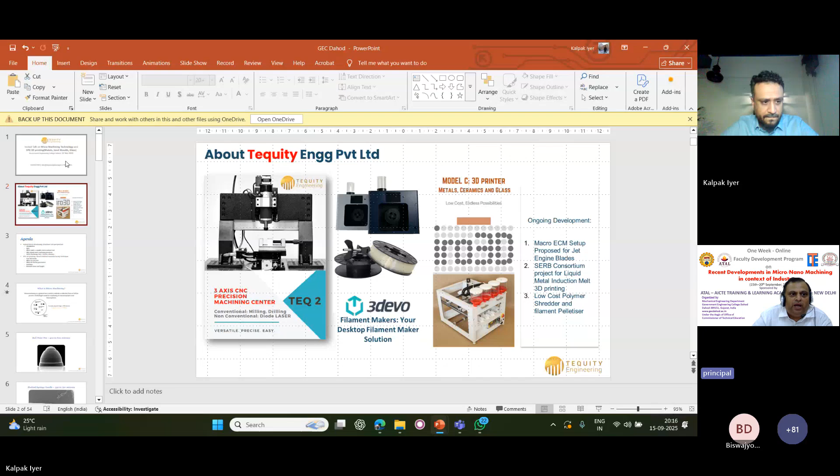Dear participants, Kalpak Iyer sir is the CEO of Tequity Engineering Private Limited, a Mumbai-based startup working in the field of lab-scale advanced manufacturing technology. He completed his bachelor's in mechanical engineering from College of Engineering Pune in 2009 and his master's in business administration from GIM Goa. He spent significant time as an employee at Mikrotools Private Limited, a Singapore-based company that most academicians know about, and later started his own startup, Tequity Engineering. It is now a 4-year-old business, and their aim is to make advanced manufacturing technology based, affordable, accessible, and high quality machine tools. They currently manufacture CNC micromilling centers, SPD 3D printers, and filament extruders for FDM, etc.

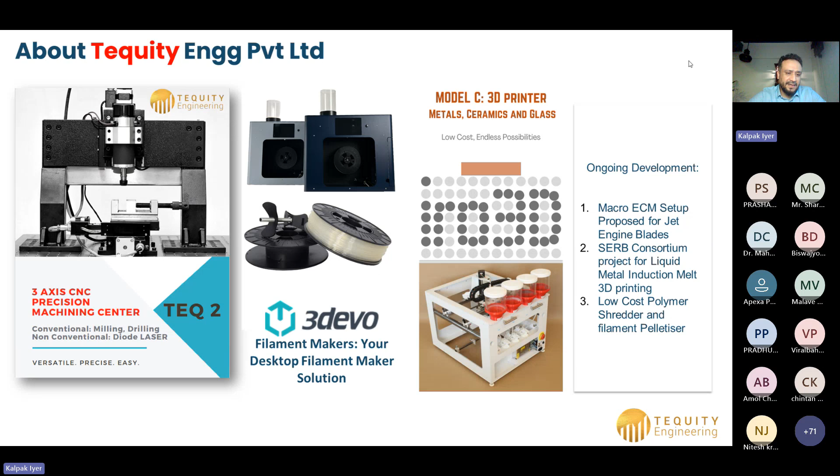So with that, I will start my talk. I will try to split my talk into two halves. The first one would be a talk on hybrid micro machining, a machine tool perspective. It shall cover what is micro machining, the three M's of micro machining, and what makes a machine tool capable. If you wanted to develop a machine tool, what are the key things to keep in mind? Why hybrid micro machining, and what is so special about it? We will look at a case study, and also, if you want to machine or build a part through micro machining, depending on what the part is made of, what machining process you must choose.

I will try and cover all of these things based on my experience. The second part of my talk shall be on SPD 3D printing, a novel additive manufacturing technique developed by us. I will talk on how this technology works, what materials we can print, the parameters for those, the machines available, and the research areas and targets. So that's how I shall structure it.

What we can do, if your permission is there, is we can split the talk in two. We can have a question answer session after the hybrid micro machining section, and one more after the SPD 3D printing section, if that is okay, because I understand these are two different technologies.

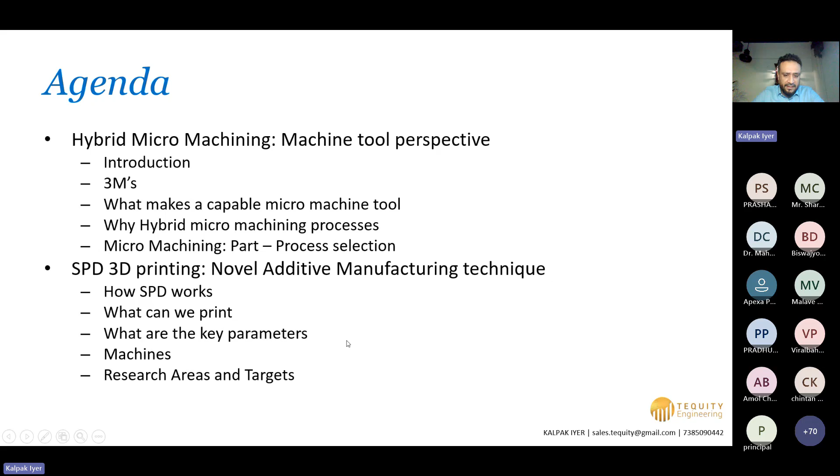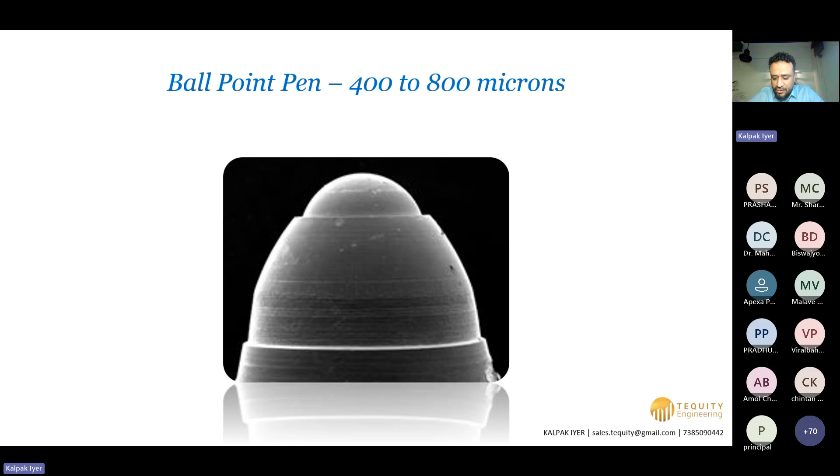I think Harshit sir covered this really well - what is micro machining. I'll just share some photos of some nice parts, something we use on a day-to-day basis. A ballpoint pen - the ball itself is micro machined. It's amazing that such a thing can be 5 rupees or 10 rupees. Sometimes it's tough to believe.

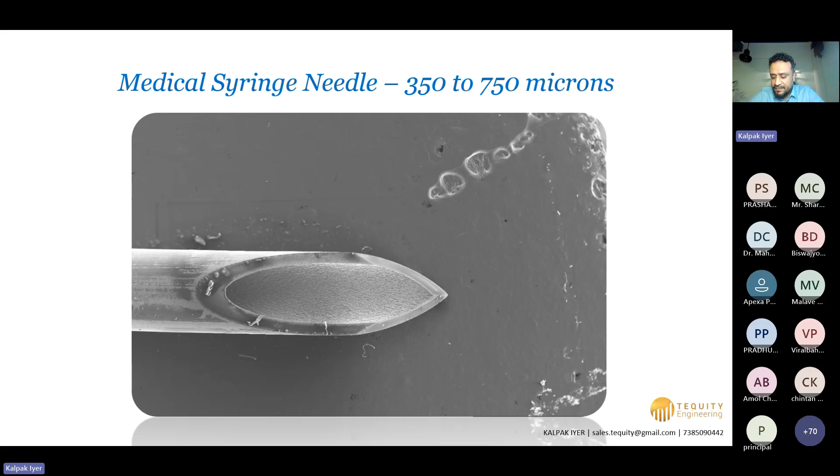Surgical needles - I hope we don't use these a lot, but now even smaller needles are out in the market, typically between 0.35 to 0.75 mm. Then human hair - some of us have a lot of it, some of us are losing it, but all of us have different diameters, tending to be between 70 microns to 180 microns.

Harshit sir had a very good explainer of what is a MEMS device - they tend to be in the tens of microns range. So as you can see, I'm going from larger to smaller.

If we really talk about things around us, nature is the best creator, definitely. Red blood cells are 5 to 10 microns. That doesn't mean we cannot make something that small - we can also manufacture nano - but what nature can do, it's virtually impossible to replicate.

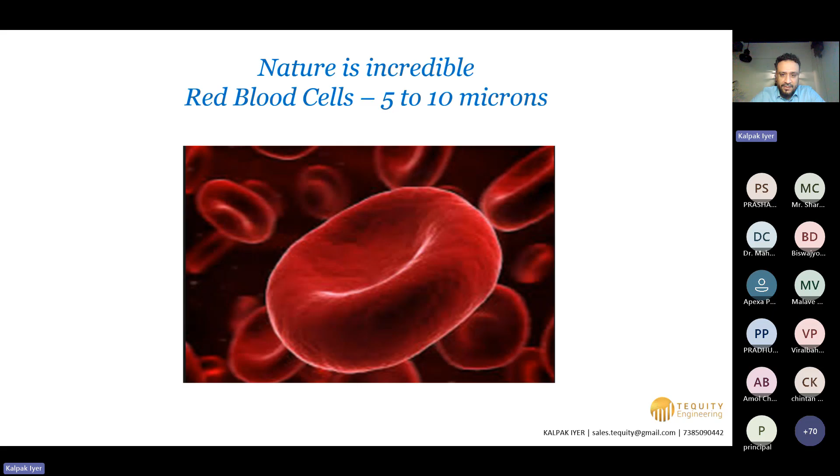There are plenty of areas of micro manufacturing, and my talk shall actually show a lot of images of parts that I have myself been part of making. It's very exciting to be a part of this field, actually.

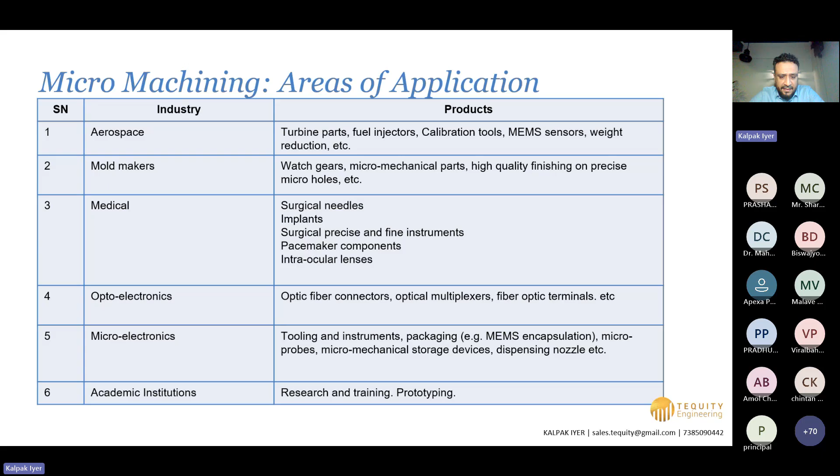So these are all the areas that we have actively worked in: aerospace, mold making, medical sectors, optoelectronics, microelectronics, and of course research, training and prototyping. A lot of areas and a lot of everyday products that we use have tons of micro machining and nano machining in them.

So let's talk about what makes a good micro machining system. As my talk will focus on machines, as we are machine makers, I may not be able to answer very well fundamental questions, although I have a fair understanding, I hope. But I will talk about the machine tool perspective.

There are three things that go into making a very good high precision machining system: the machine tool itself, the machining process that you employ, and measurement. These three are very crucial, especially if you want to achieve high precision micro machining. Let's look at each of them briefly.

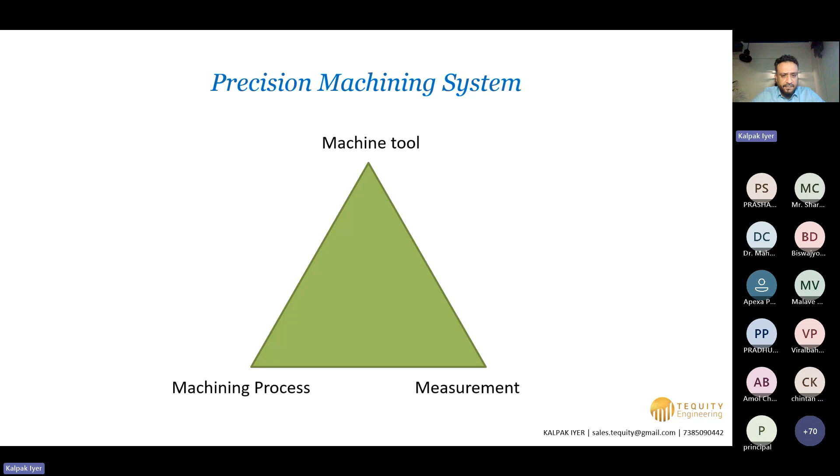The machine tool itself - now I have to give credit here to Mikrotools Singapore. I will be giving illustrations on micro machining through one of their machines, DT110, which is, in my opinion, one of the most capable, versatile micro machine tools in the world. It was created by Mikrotools Private Limited, a Singapore-based company. No intention to market the company here - the idea is let's take examples from some really good, industry-proven techniques, and let's try to learn them, deconstruct them, something like that.

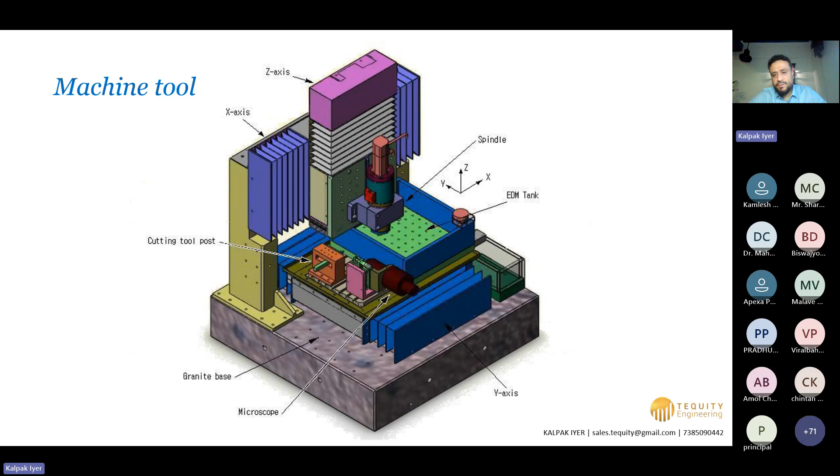We need a very stiff, low vibration, rigid, high precision structure to be able to do micro machining. If any of these are not in place, it is very difficult to achieve high precision micro machining. So here are some broad characteristics required for the machine tool.

Firstly is the drive contact mechanism, whether you go for mechanical, aerostatic, or hydrostatic driveways. Then the motors you select. Broadly, micro machining tools use stepper motors, AC servo motors, or linear motors. Each has its own benefits.

Real-time error compensation: a lot of micro machining can be open loop, and then you're at the mercy of hope and nature, because over time wear will happen on your guides and drives, and you won't be able to compensate for it. A closed loop system is usually much better because it gives you real-time error compensation. Even a 20 micron error can completely derail your part, because sometimes your parts are themselves 50 microns or below.

The encoder's resolution is very important—the encoder is the device that reads the position. It is preferred to have laser interferometry here, so optical scales are better to use, and also rotary scales. Some very good rotary encoders are on the market. So which encoders do you use? That is, of course, if you're going for a closed loop system.

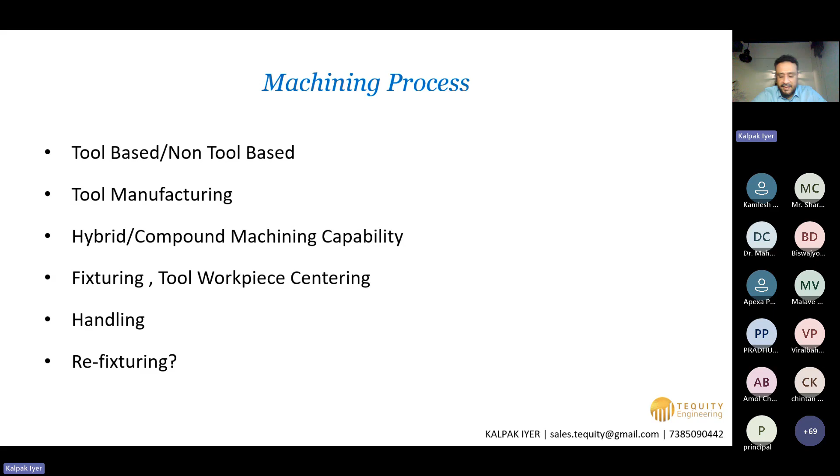So these are the aspects of the machining process. And finally, the aspects of measurement.

It is preferred to have on-machine measurement when trying to do micro machining. You need to, as much as possible, reduce manual intervention and handling. You need to reduce refixturing as well. That is where the number of axes on your machine will actually help.

In the case of reducing handling, the versatility of your machine matters—for example, the same spindle can do milling and then start doing EDM. That will reduce handling. Real-time measurement and viewing can be very important in tool-based processes, especially optical measurement and sensor-based measurements for different types of sensing.

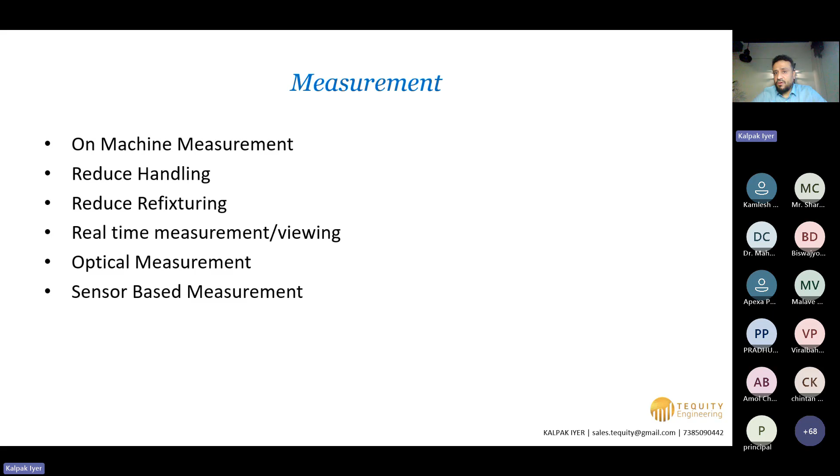So these three things—the machine tool, the machining processes, and the measurement systems—are all the ingredients to make a good micro machining center. One has to choose which one they need to prefer and go for.

As you can imagine, the choice is always limited by cost. You can want a very precise machine, but the cost starts going up, and not just cost, skill. It's not simply that I can buy components and sit and assemble them. There is a lot of skill involved in making these machines.

A very good example is the DT110 machine that I spoke about. The single same machine can do these following processes. The ones in red are tool-based processes: micro turning, milling, drilling, and grinding. The ones in orange are electrothermal processes: micro EDM, micro wire EDM, and micro wire EDG.

And this is laser machining. So all of these processes on the same machine—we will see what makes it so capable and why there is value in having all of these processes on the same machine.

The machine is basically a 3-axis machine. It would be better if it was a 5-axis or a 7-axis machine, but you can't always get everything. It has closed loop continuous control. It has on-machine measurement through an optical microscope. It has a fairly decent positional accuracy of 1 micron per 100 mm.

Machines that were even 8 to 10 years old displayed a very, very tight accuracy. Resolution of 100 nanometers—resolution is basically the least value that the machine can read and travel. It has an electrically isolated spindle.

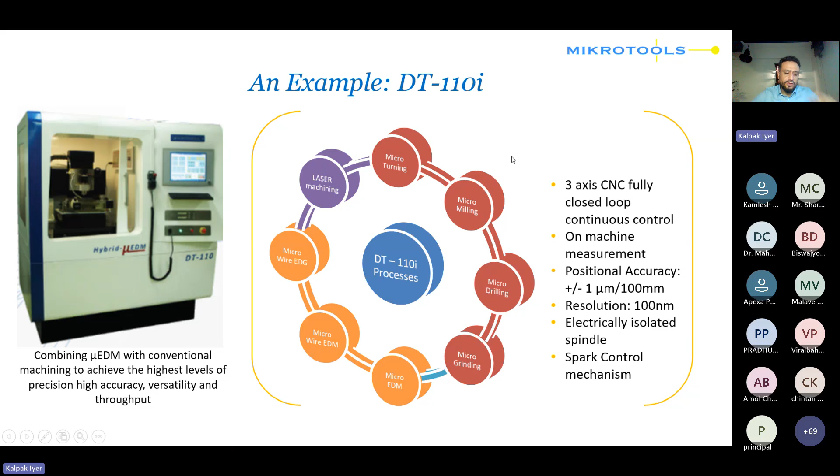I will just be keeping my talk with the focus on this machine, but we will be talking about different types of micro machining. So continuing on what makes a capable micro machining center—the idea of sharing this information is so that it serves as a guide for somebody who wants to develop their own machine and maybe wants to get some good pointers on how to start.

So what makes a capable micro machining center? The basic specs, the travel—how much travel do you need? Typically 50 mm to 200 mm is the travel for each of the axes. Good enough for micro machining, but sometimes larger machines are required. For example, large dies and molds require very small holes at select locations.

The machine has to be built with consideration of maximum vibration isolation, stiffness, accuracy, and corrosion resistance—very important aspects for developing a good machine. The accuracy and repeatability both should be better than 5 micron per 100 mm of travel. I think it goes without saying, and I think we all can appreciate why that is the case.

And gantry structures are good structures for these types of machines. Again, gantry structures provide the best rigidity and very high stiffness compared to many other structures. There are fewer overhangs here.

Isolation, vibration isolation—you can have passive isolation. Passive isolation is basically dependent on the materials you select. For example, you use a monolithic granite base or a ceramic base. You use cast iron components, which also aid in damping. Also, you use some passive damping pads below the granite base so that all vibration can be absorbed by the machine.

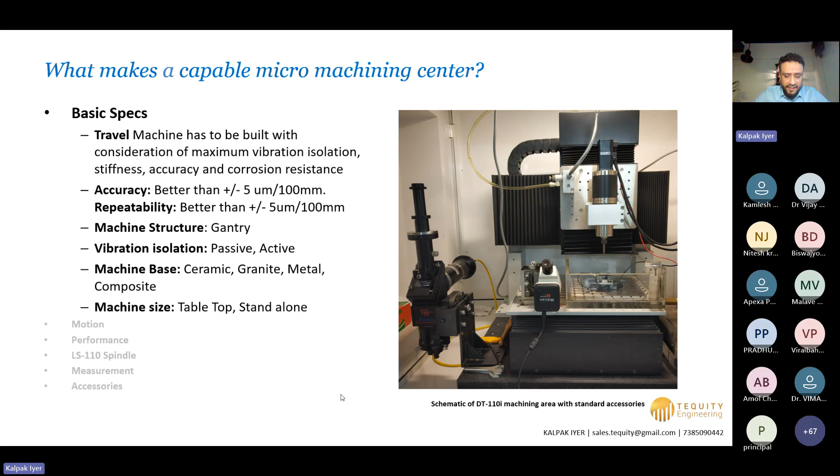Then the motion, very crucial for any CNC machine - what type of motion you choose. Typically LM guideways must have high rigidity, accuracy, reliability, and smooth motion. When you want all of these things, it is a little expensive to choose the right one, because it must also be able to withstand even the smallest radial loads and moment loads that the machine can generate.

A micro machining system will not generate anywhere near the radial or moment loads or the axial loads that a large machine will generate. But even those small loads have a lot of impact on the quality of the parts.

The slide stiffness is a very, very important aspect because if it is not stiff, especially on dynamic load conditions, you have very unreliable results of part finish, of part dimensions, etc.

Then the drive that you choose - lead screws also work. Lead screws have a bad name, but lead screws can be very well made and they can work. Ball screws are better, lower friction, but linear motors are the best and the most expensive. Very rarely does it happen that the best is not the most expensive. So it is the case here as well.

Same with motors - you can use stepper motors. Stepper motors are very strong, quite accurate, but they have much inferior jerk control systems. They cannot get to their top speed as fast as something like servo motors. But again, here the best in class is the linear motor, definitely.

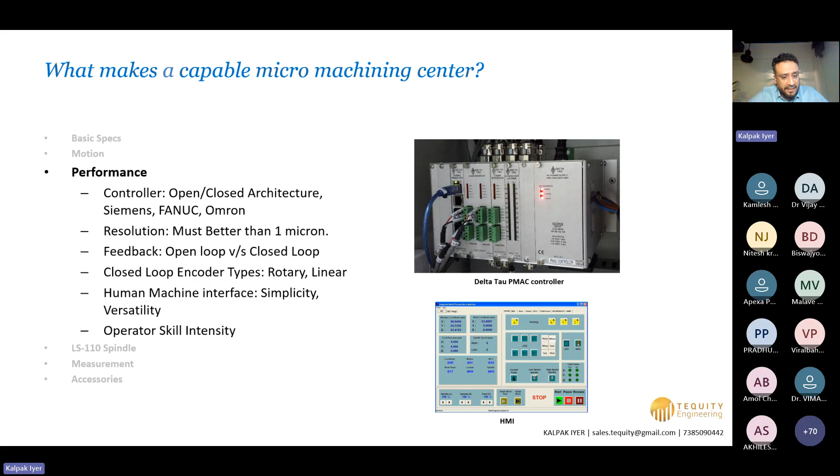The next one is the HMI, human machine interface, and operator skill intensity. Of course, it all boils down to the spindle head. For micro machining, you want high RPMs - upwards of 20,000 if possible, upwards of 50,000 is better. Then there are some considerations of the runouts of the spindle, radial and axial runouts, and what kind of torque or power output they have.

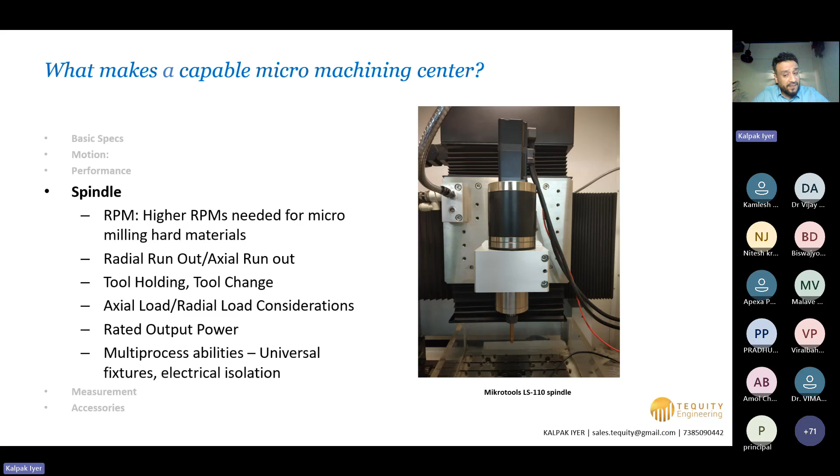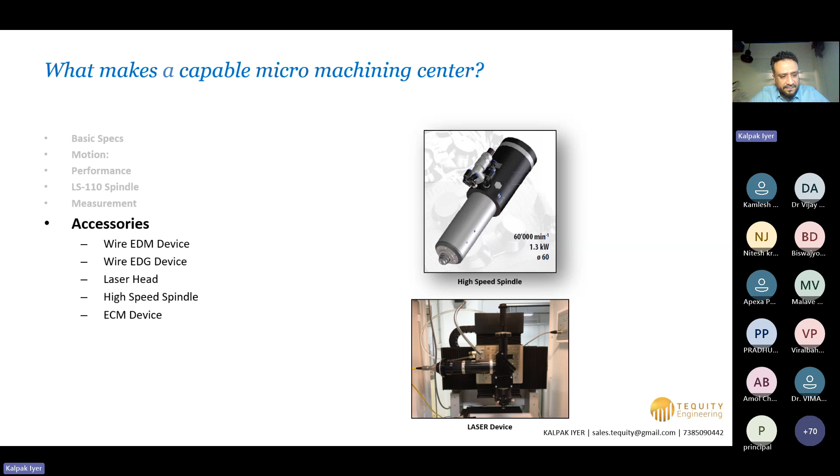And also, because we're talking about hybrid micro manufacturing, we should have switchability of tool heads. It's a very useful feature in micro manufacturing, as some of my examples will show you. Good to have a good measurement system on board if possible. And some accessories - for this machine, there are accessories like wire EDM, wire EDG, laser head, high speed spindle, and ECM device.

So the case study that I promised you - the objective was to make a well finished 40 micron hole on a stainless steel plate. So how do you do that?

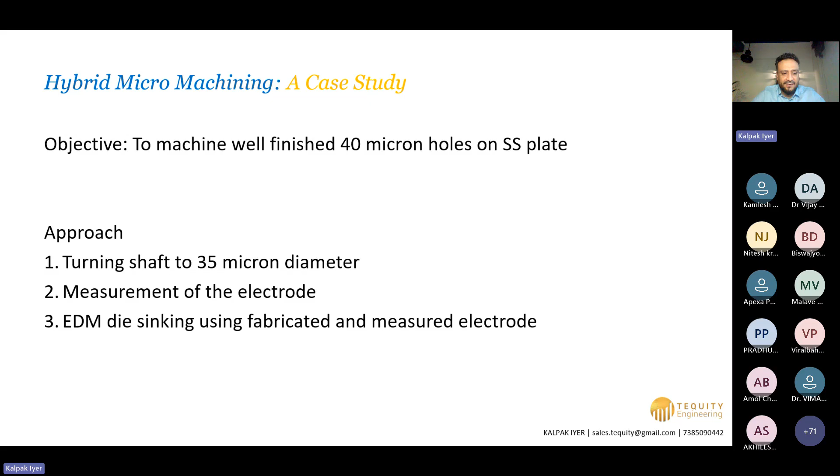The approach idea was that let us turn the shaft to a 35 micron diameter. We'll measure that electrode - that shaft becomes the electrode, because the spindle, after micro turning, can actually be made into an EDM spindle, and then it can EDM the hole. So this is as simple as that - what is so difficult, right? Let's make a 35 micron diameter shaft, measure it, and EDM the holes.

Quite straightforward. You start with micro turning, done with the aid of the measurement system. You need to be able to center the tool with regard to the workpiece. The workpiece is usually mounted vertically on the shaft. The tool is on the bed - a single point cutting tool, a PCD tool, polycrystalline diamond.

Harshit sir said very aptly that up to 100 micron, micro turning worked quite well, but after 100 micron... so a brass workpiece was selected and micro turned up to 100 micron. The machine is so well built, it did it, and you were able to see it happening live. You can see the image here, and then we tried to go below, and this deflection starts happening - it's quite irritating.

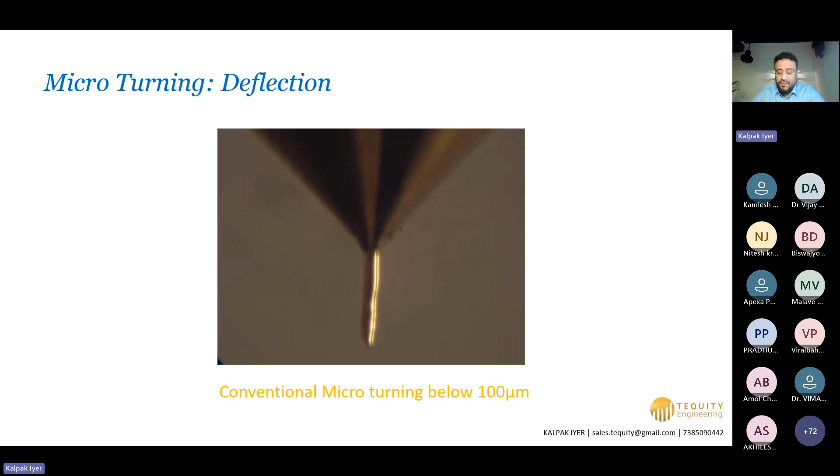So is it because the material you bought, the vendor is cheating you, or maybe the tool is not good enough, or whether the machine is not stiff - you start doubting yourself a lot, especially with these kinds of machining technologies. It starts to become apparent that the nose radius of the cutting tool used is usually 200 microns, 150 micron nose radii.

So the nose radius, instead of becoming purely a cutting agent, always adds a radial force. If this is my shaft, there is a radial element to the cutting aspect of turning, and majorly we want axial shear, but there is a resultant force. A big stock is easily able to withstand this and does not deflect, but when you start talking about sub 100 microns, deflection becomes a real problem.

So why don't we have a tool with a smaller nose radius? Well, because it's not easily available or it's extremely expensive. And there is a reason why we have a nose radius on cutting tools - I will not go into why, we all know why. We cannot start with a very small nose radius tool because we know it will chip off and become useless.

So the idea was, let us machine up to 100 micron through turning. Then, because our machine's spindle has the capability of doing EDM, let us switch on the EDM and do wire electrical discharge grinding - an EDM process. Long story short, this nose radius became this.

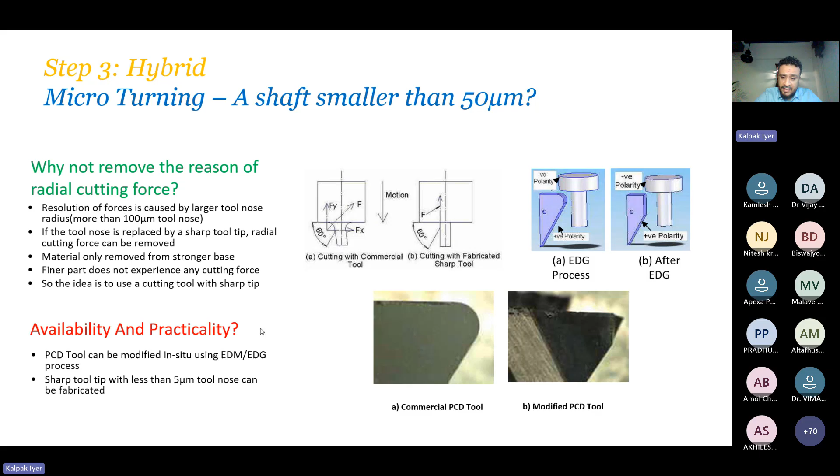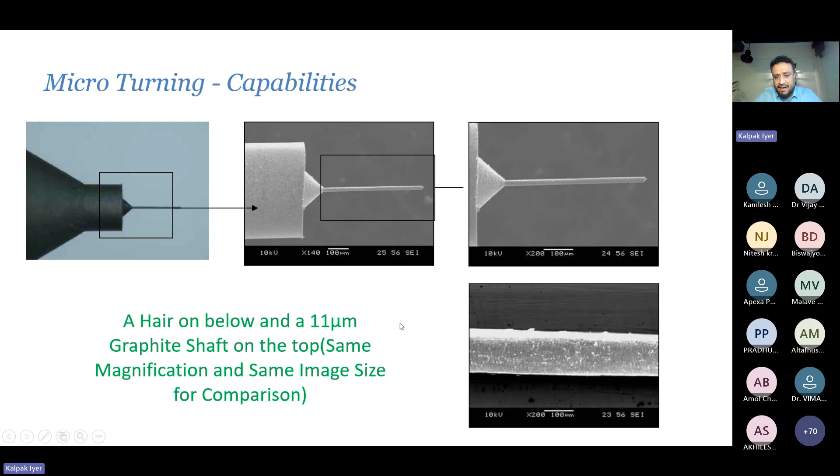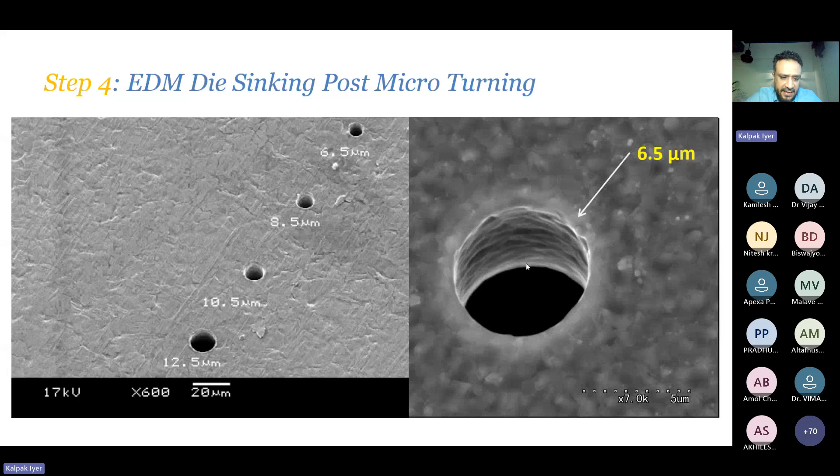And when this was made, this was the smallest hole made through EDM process - 6.5 microns. So that turning insert, or the turned electrode, was further turned to 5 microns, and then a 6.5 micron hole was made on stainless steel. Quite interesting that it was possible to do this.

So now at the business end of the presentation, some of the micro machining processes - some images of parts we've made, actually in India, at different places over the years. So these are some EDM electrodes. This one is not made in India - it's a surgical pin made in Singapore.

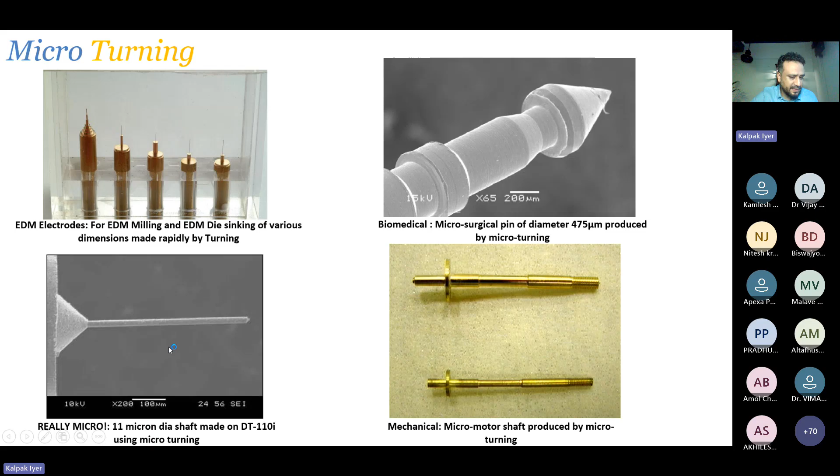This is the shaft that I showed you. Then some motor shafts that some of our clients made. Micro milling is a very interesting operation. Most of the images here are made here.

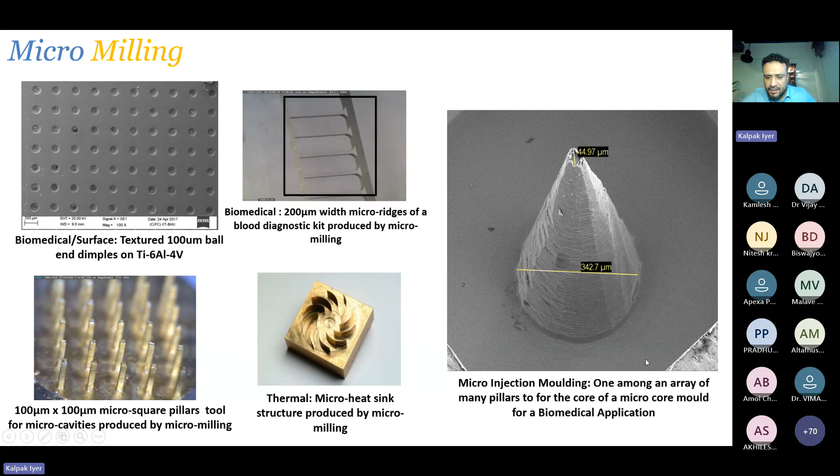This is a very challenging part that we did with IISc Bangalore, where this is SS316L, and we made these pillars. The base of the pillar is about 350 microns, and the top had to be 40 microns. So very difficult to achieve this without breaking the pillar. This was done through milling, successfully at that. So, micro grinding.

It is not really conceivable to put a glass workpiece on a machine and get on with it. You know what is going to happen? It's going to shatter. So you need to be careful about how you handle glass or other brittle materials, and you need to get a lot of the parameters right, especially the tool speed and the tool type.

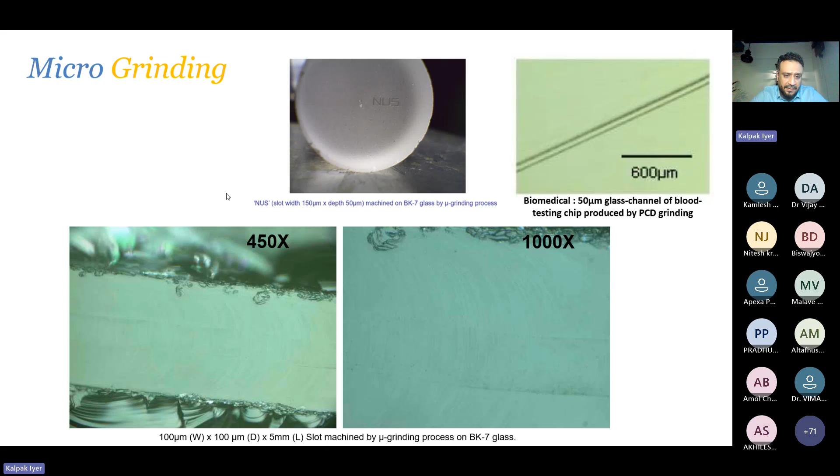Here we use some kind of PCD or CBN grinding heads or other abrasive media, and we give very light depths of cut. We have a very narrow range of the depth, and we are able to do micro grinding successfully. A lot of work on this has happened at IIT Patna, very good work on micro grinding on glass.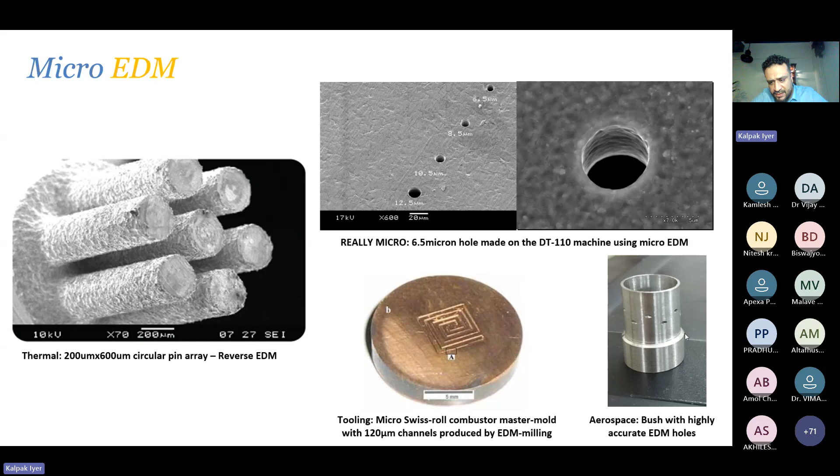Then some 120 micron channels. These are 200 micron by 600 micron arrays. And this part we made for ISRO—it is a bush with highly accurate non-radial holes using micro EDM.

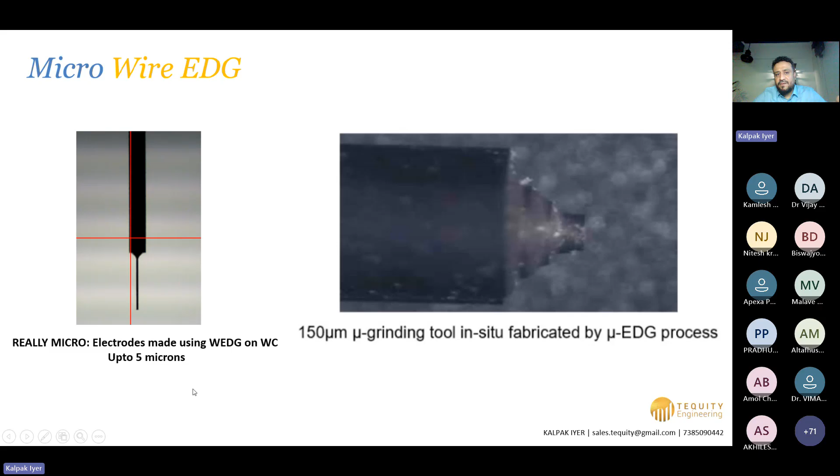It's very small. Again, this is through wire EDM—some micro fins made, micro gears made. Wire EDG, which I told you about during the example of micro turning, is a very interesting process. Even some of the micro grinding tools are made in situ on the machine using the wire EDG process. Electrodes down to 5 microns can be machined this way. Of course, for electrical discharge grinding or machining, the tool has to be of electrically conductive material.

And well, last but not least in my presentation, is laser machining. Very fast, very expensive, but a very useful process for micro machining. A lot of the other processes are slow and very intensive, but this is very good for 2D machining.

Or making some holes. Here on the right top, you can see a part from a trial we were doing with DRDO, of a spin actuator for triggering missile systems. This is a micro heater made out of nitinol, or shape memory alloy, for an aerospace application.

These are just some silicon blocks that we machined, and some micro cavities for micro needles were machined using micro laser machining. Okay.

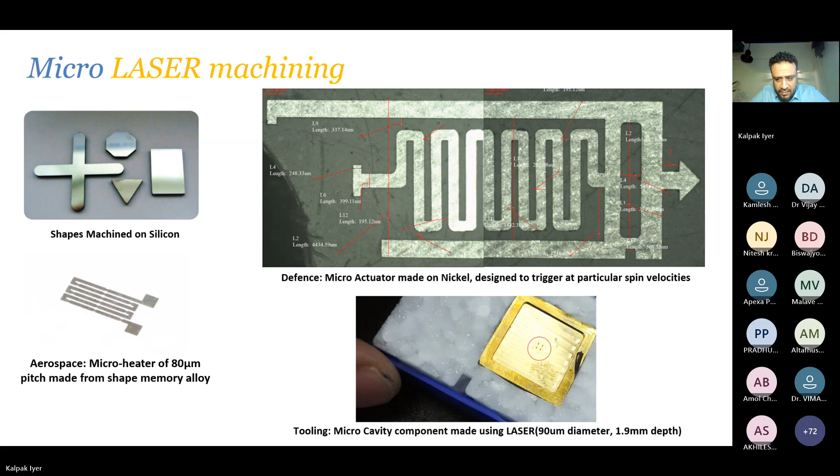Finally, I think this is the last slide on this subject—which process to choose? There are more processes, right? By no means have I comprehensively mentioned the processes for micro manufacturing, but these are quite a lot of the processes. And as you can see, if you're able to combine the machining process and the measurement systems well, micro machining is really possible.

As a manufacturer of small machine tools, we make micro milling machines at a very affordable price. Of course, you have to make compromises when it comes to these tools. The idea why I chose to make these machines is because the presentation I gave involves a very expensive machine tool, and not many industries can really adopt it. The idea was that, hey, I don't want 100% of the capabilities—why not 80% of the capabilities at a much lower price? So we put a lot of those learnings into action, and hopefully we are able to do something good with it.

Now, as you can see, some of the attributes that you want to have.

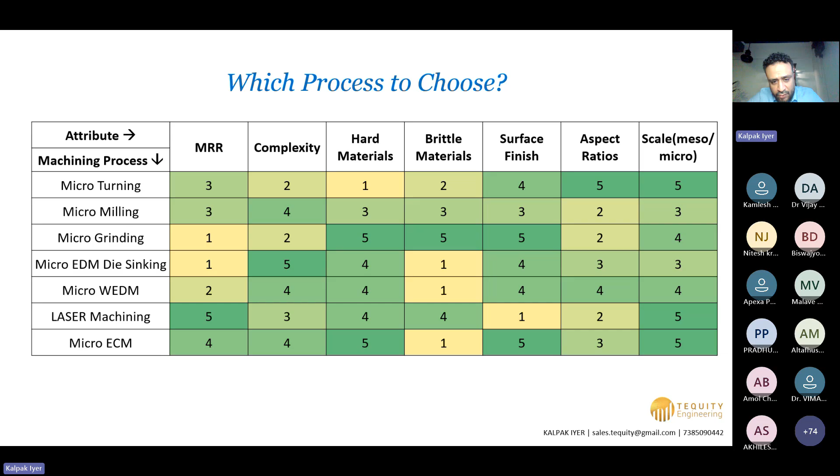So each process has its own pros and cons. It can approach different materials, because the first part of the presentation was about the machine tool, but at the end of the day, what do you want to machine? Based on that, you choose your process, go about fixturing it, set your experiment or process, and then try to achieve your part. So that was my talk on micro machining.

If there are any questions, I would like to address them now before I continue on to the other talk on selective powder deposition.

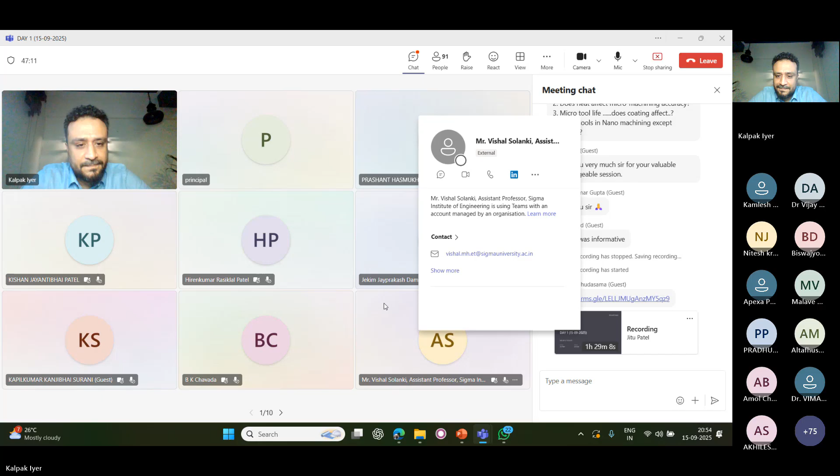Is there any question? I hope the presentation was visible and I'm audible throughout, sir. Okay, I'll start with, hello, yes hello sir. I'm seeing the message box, I'm seeing it, some participants have asked certain questions, sir.

Shubhangi ma'am has asked which software tools are used in micro machining machine video. I shall share a machine video link later on. I can definitely show software tools used in micro machining, though I don't exactly know which software you're talking about. If you're talking about the HMI, human machine interface, most companies design their own software.

Then there are some other aspects in micro machining, especially CAM. You need to have a very good CAM, especially if you're doing complex parts. Mastercam or SolidCAM or some other software can also do really good work. I'm not sure which other user-friendly software you're asking about.

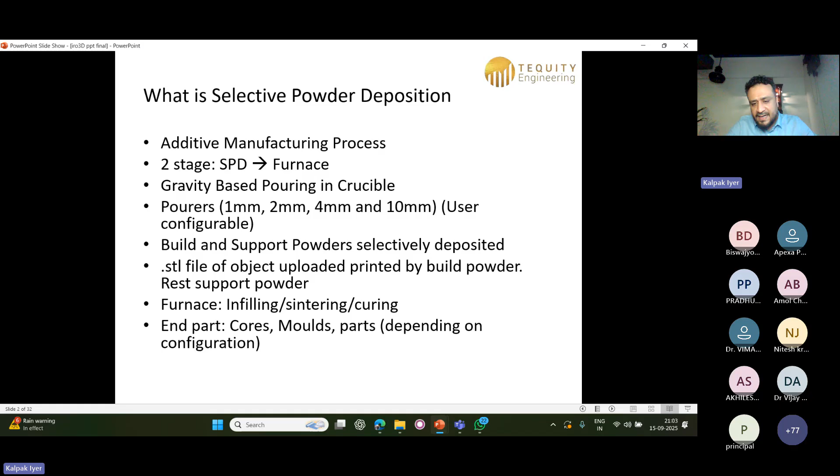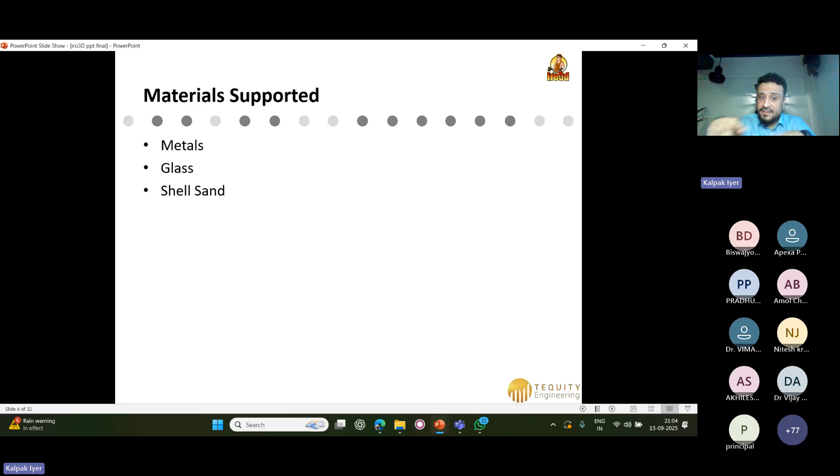I'll come to each of these. What are the end parts you can achieve? Cores, molds, or parts of metals, glass, depending on your configuration. Now here's the interesting thing - most 3D printing processes will only support one category of material, whether ceramics, metals, polymers, sands, composites. So most of them will usually support only one type of material. This process is material agnostic - we can print metals, glass, and shell sand in the same process.

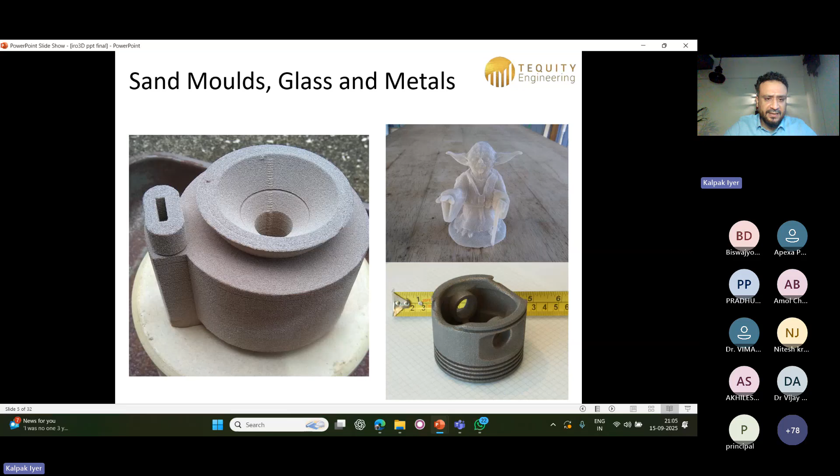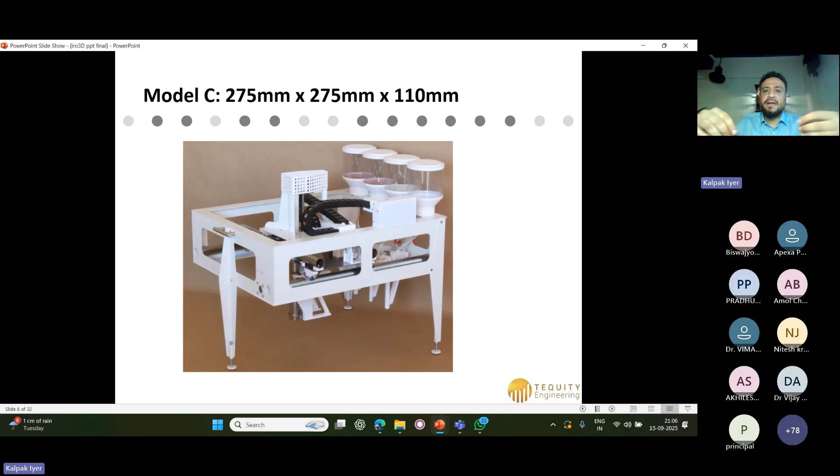Now let me explain a little bit from this image. This is a Model C, a basic version of this printer. As you can see, there are 4 hoppers, and each hopper is connected to a pourer - you can see some things dangling here. There are 4 pourers. 2 of the hoppers and pourers connected will have support powder, and 2 will have build powder. Support powders are usually refractory materials like silica sand, alumina sands, ceramic sands, etc. The build powder is of the part that you want to print - for example, if you want to print a metal alloy, the build powder will be metal powder. If you want to print glass, the build powder will be glass. And if you want to print a sand mold, the build powder will be appropriately resin coated sand. So this is the basic aspect of the process.

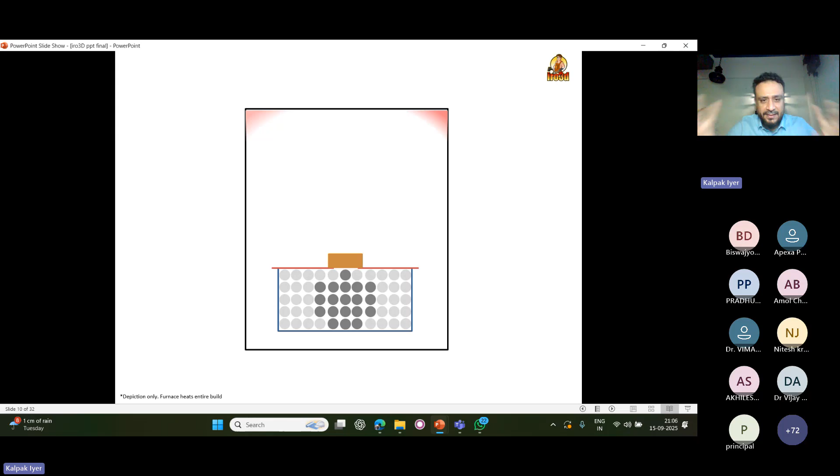And then you take it in a furnace, you do certain furnace activities, heat, depending on the process - I will explain each of the processes. And you are able to achieve an end part. Now let's actually look at the video and I will explain through this video what is happening.

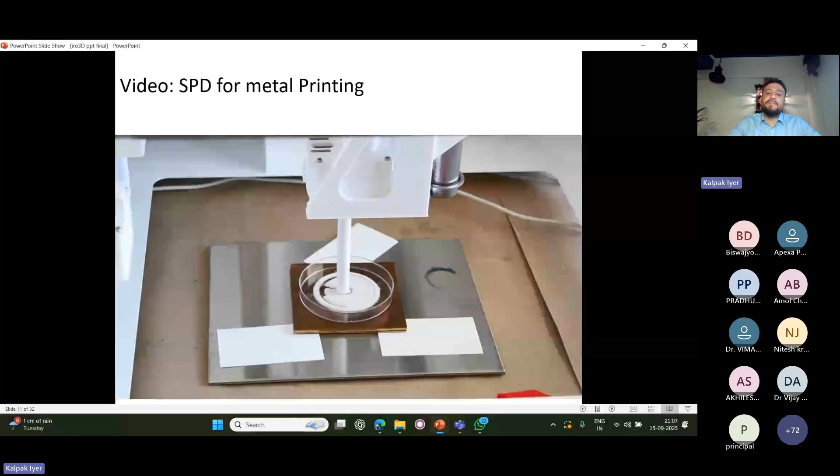So this is the 3-axis CNC machine - that is actually a 3D printer. You can see a pourer. Pardon the amateur quality of the video, it is a very new process. This is the silica sand being poured. The reason we're showing it in a petri dish is so that you can see the process. You saw it went and parked the pourer, it went and fetched another pourer.

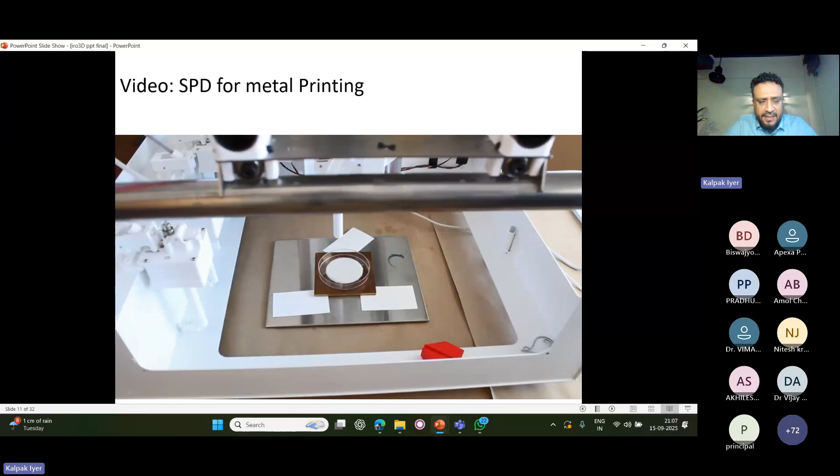Now this will park this pourer and fetch a build powder. Build powder is metal, iron powder in this case, so the illustration is for a metal alloy part. As you can see, iron is being poured here selectively. Now the idea of the sand around the iron is so that the iron can stay - the build powder can actually be supported, and this happens layer by layer till you have the full part.

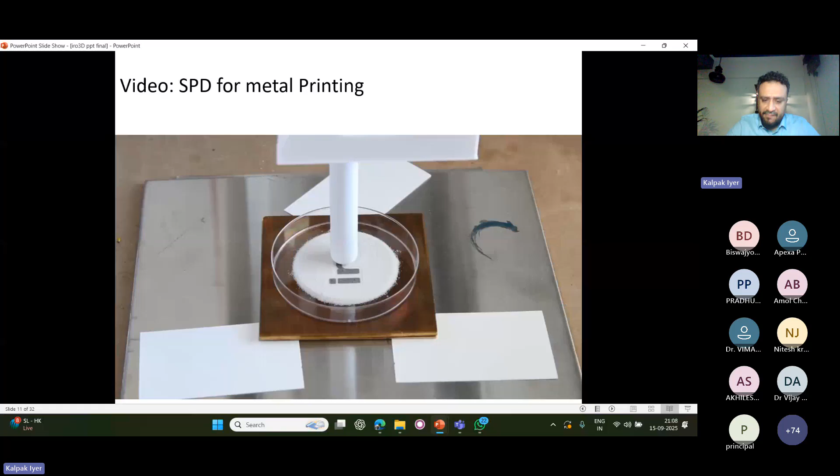Now just the iron will not make the metal part, because if you put it in a furnace, at best you're sintering it, and sintered metal without pressure, only temperature based sintering, is not going to yield a strong part. So you need to have an infill - I will come to that in the video as well. The idea of the infill: once you have 3D printed this object, here iron is the build powder, sand is the support powder. This is how it actually looks inside the crucible.

Once you have 3D printed it, you create a runner at the top of the print. A runner is like how we do it in castings or injection molding, very similar, and that runner will be of the build powder. You can see here... let me pause it. The runner is of the build powder. Oh, what happened? My bad.

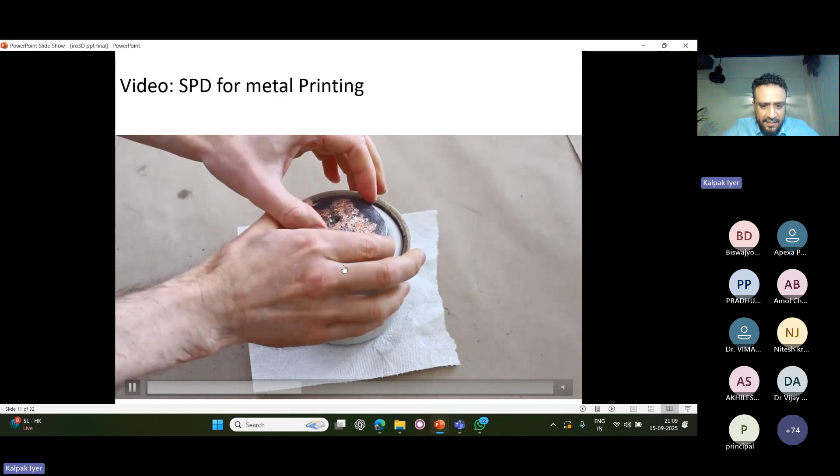Sorry for this. You see that? That runner was the iron powder, and all the white around it was the sand—silica sand, very neatly deposited. On top of the runner, we place an infill metal, which is the alloying metal, the metal that is going to melt and alloy into the iron powder. Since the iron powder is the build powder, we are using copper as the infill, so we expect the end alloy to be an iron-copper alloy.

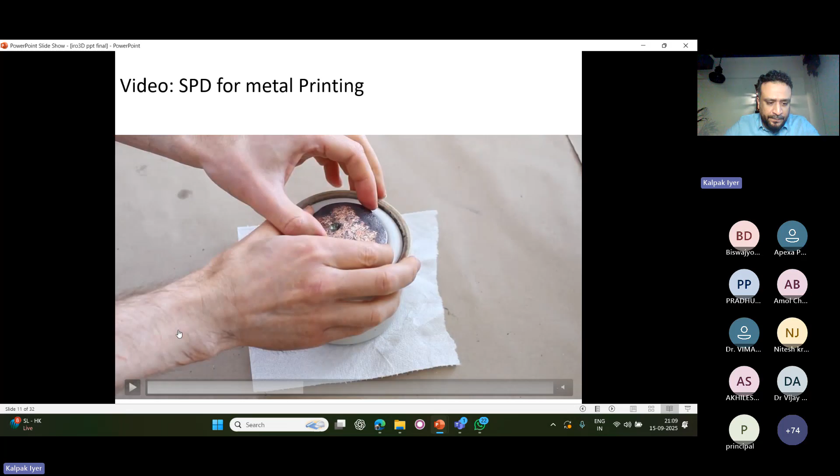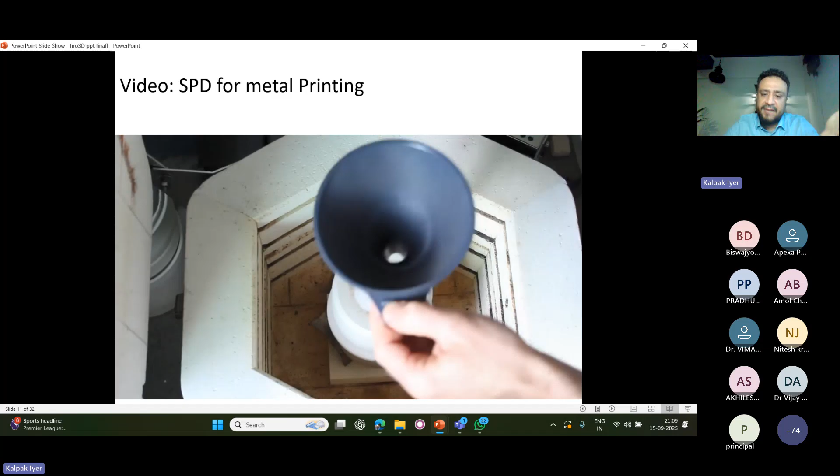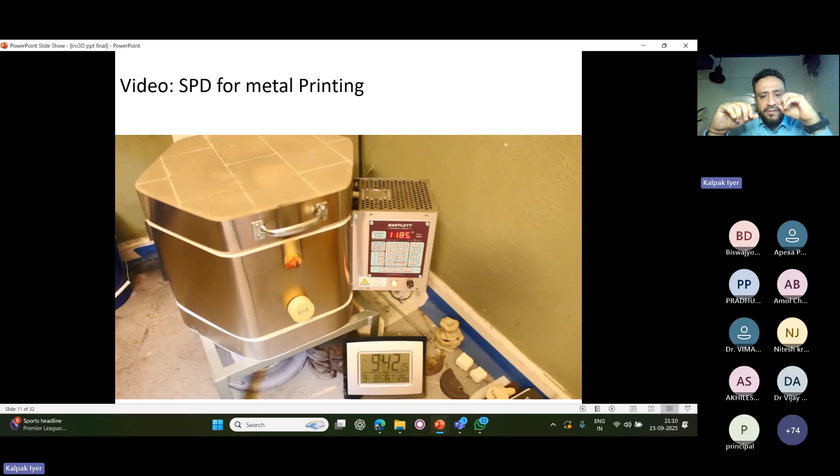Once this is done, you close a lid and add some reducing agent, because reduction has to happen. The build powder, iron powder in this case—most metals tend to oxidize and have an oxidized layer, so iron will have iron oxide on its outer boundary. If copper melts and drains from the runner into the print, iron oxide is present instead of elemental iron, and most oxides are not wettable. So we need to remove the oxide layer, which is why we added carbon, the coke. The coke aids in the reduction reaction—I'm oversimplifying, but long story short, the reduction reaction is initiated and the iron oxide layer is reduced, so elemental iron becomes available for alloying and diffusion with the copper.

I'm saying iron and copper because this example uses iron and copper, but we can print many other metal alloys too. As you see, the copper has melted into the iron, and diffusion will start taking place, forming an iron-copper alloy. Note that the iron never melted, only the copper did—it's important that the build powder has a higher melting temperature than the infill material, which is placed on top and melted. Infilling is a commonly used process in alloying, nothing new for anyone familiar with alloy manufacturing. We're using the same process but in a 3D printing environment.

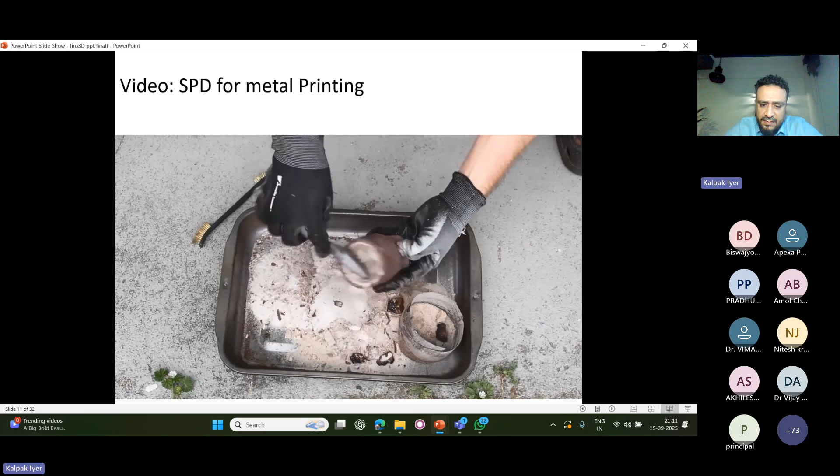Okay, so let's see how the part looks—take it out of the furnace. As you know, copper's melting temperature is about 1080 degrees, so you have to take it above that, and you have your part. Now, the video did not show the earlier footage I showed—this is not the piston part, this is a different video. Of course, we made a piston as well, and many other objects using this process.

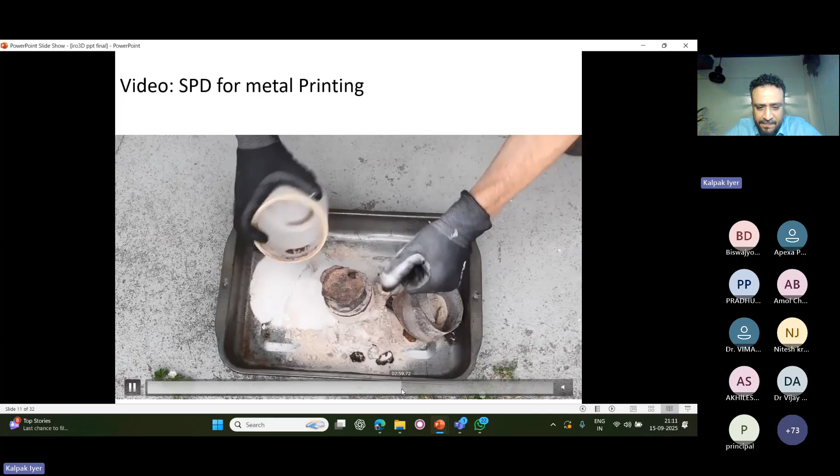So that was the infilling way of using SPD, selective powder deposition—you can 3D print metals this way. There are two more ways to use the machine. One is sintering: if I don't add the copper at all, no infilling happens, only the iron powder will sinter with itself. Some materials sinter very well, and some don't—most metals don't sinter very well. Nevertheless, it will sinter, you'll have a solid object, but it will be very flaky, easily break, and shrink a lot. Sometimes sintering is desirable though—for example, if you want a high surface area or want to create a foam, you can use sintering with metal powders itself.

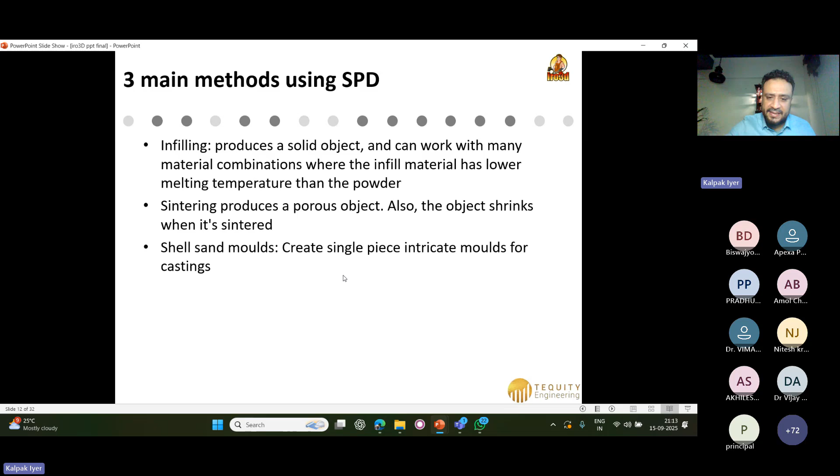That's sintering, but we also use sintering for glass—I'll come to that later. The third way of using it is shell molds. Instead of the build powder being iron, if I use resin sand, I can bake or cure it at 200 degrees Celsius in an oven and have a resin sand mold. Again, I'll come back to that, but first let's talk about metals.

So certain parameters about the process: the powders have to be spherical, typically between 60 and 300 microns. This is not a hard rule, just a broad outline. Why spherical? For flowability, because our pourer has a 1mm or 2mm hole. If you don't use spherical powders, they tend to jam and clog the pourer, and your print might suffer.

But it is not a rigid requirement, preferred to have spherical. Second, the infill metal should have a lower melting temperature than the metal powder. Third, you must create a reducing atmosphere, so carbon monoxide or hydrogen. If you have an atmosphere-controllable furnace, you can work with a lot more materials than a normal furnace, because you can introduce hydrogen and have very clean alloying happening.

Non-reactive metals are easier to reduce. So the build powders that can be used are these materials: iron, copper, nickel, tin, lead, molybdenum, bismuth, cobalt, tungsten, palladium, cadmium, silver, gold, platinum are examples of non-reactive metals. They can be good choices for build powders.

For reduction reaction, anybody interested in this field, please refer to something called the Ellingham diagrams. Anybody from the metallurgy background will be well versed with it. The Ellingham diagram basically gives you the right amount of reduction agent to be added and what temperature the reduction reaction will take place.

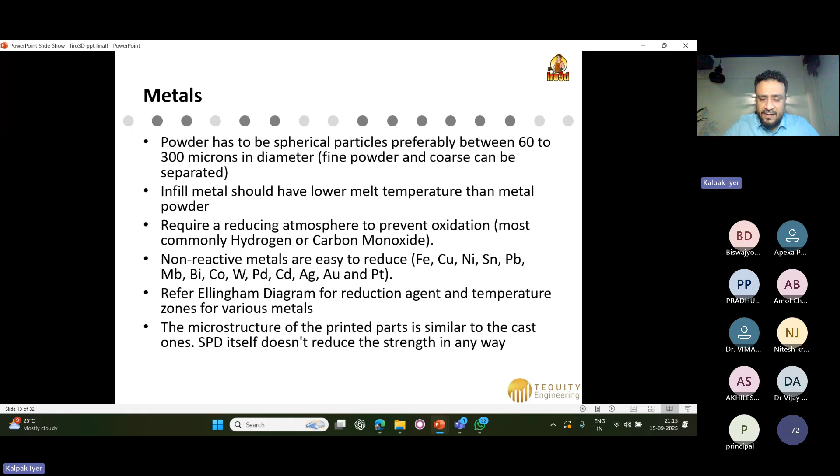Finally, the microstructure of these 3D printed metal alloys is quite similar to castings. If you do casting, you will have very similar outputs. SPD does not reduce the strength in any way. Another very important aspect is there is no shrinkage in the infilling method, so there is no porosity and there is no shrinkage. No porosity if you get the process right, and no shrinkage by the very characteristic of the process.

Now remember, when the infill is melting and pouring through the runner, it does not interact with or wet the support powder or silica sand that we use. So there is no interaction. You have to use an appropriate support powder - the molten metal should not chemically react with it, and physically it will not wet it because the refractory is not wettable in most cases.

We are having no shrinkage, very low or negligible porosity parts. And it's a very, very low cost way to print metals. All the other ways of printing metal usually are very expensive. In the case of sintering metals, you will have significant shape distortion - it will typically shrink volumetrically. It is excellent for printing porous glass, metals, bimetallic foams, etc.

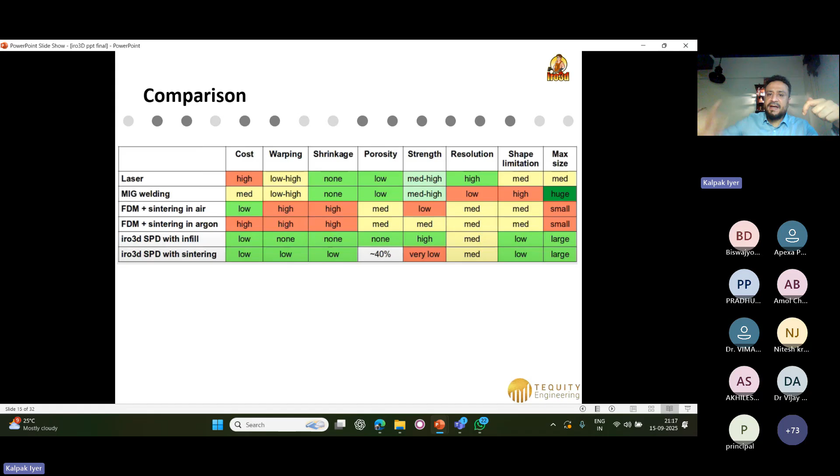So typically a very interesting way of printing metals. Now, where we are currently lacking or behind - and I'm sharing this with you because you can also help us - it's a new process. So there's a lot of good R&D, or process R&D, required, but from a perspective of validation, the process is very valid.

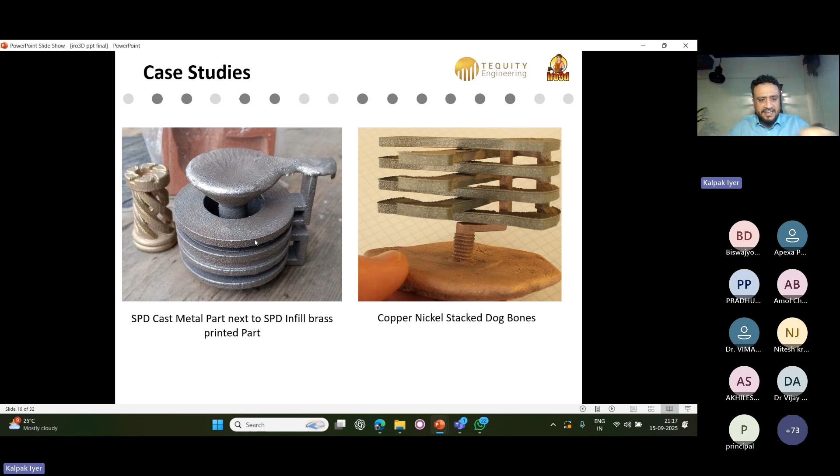Some more case studies - you can see we made a rook, which is made of brass. Then we made these tensile test specimens, which are monel or copper nickel tensile test specimens. This is actually a casting, also done through the mold shown in the first photo, so this is stainless steel casting. You can see fairly good surface finish of this casting.

Now next is glass - please bear with me, my presentation will not last more than 5 to 7 minutes more. Well, for glass, we use only the sintering method and we can achieve glass objects. So far, glass has been majorly a novelty item where we have not really had any application, barring some decorative use cases - some helical gears here.

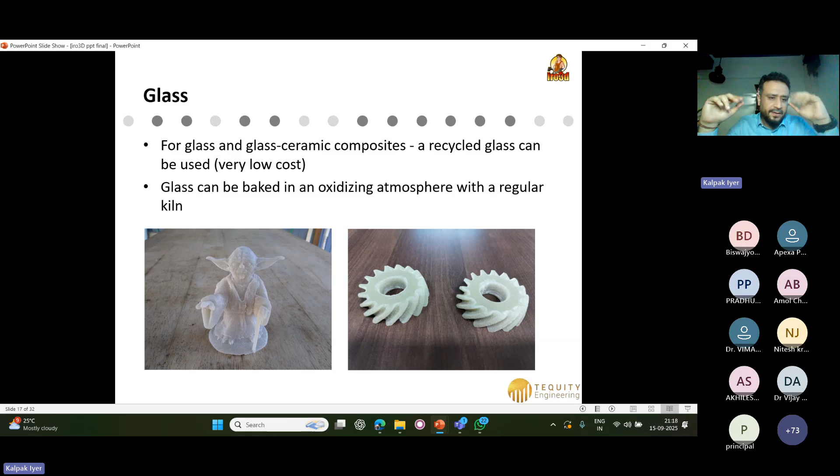In fact, this is printed at Harshit Sir's lab at SVNIT. And this is a Star Wars baby Yoda that we printed using glass. We are now very close to actually start 3D printing non-porous and semi-transparent glass. If anybody is interested further in this area, or this is an area of work you want to explore, we can always have a discussion on this, because we are also looking for help in this field.

And finally, our process and our machines - this process is starting to find industrial application in an area we did not expect it to have even one year back.

We only started off with metals and glass, but now we have shell sand molds, and we've started to have industrial applications of this. Basically, we use resin sand as the build powder, and silica or alumina sand as a support powder. We call this the SPD 3D printing process.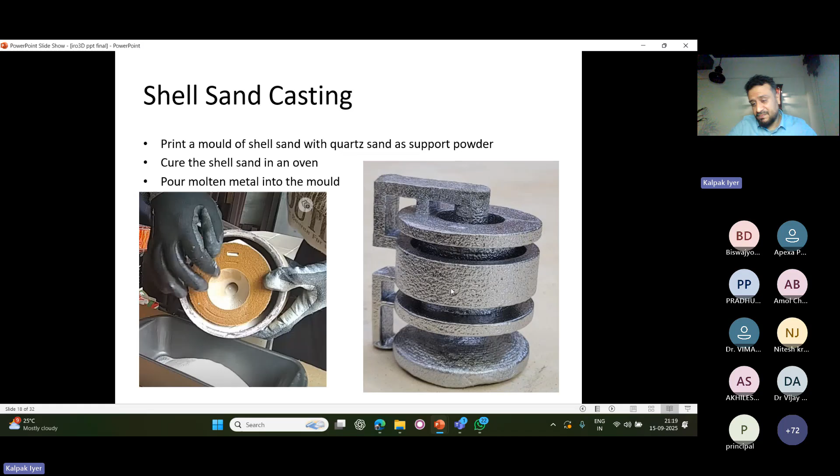Okay, some more examples. Here's another video of the resin printing in action. Sorry for the average video quality. The dark brown sand is the resin sand, and the white sand is the refractory or silica sand.

This is actually for a vendor in Rajkot, and this is one part of a butterfly valve for oil and gas applications. This is a core for butterfly valve castings. It's a large casting that the company was not able to manufacture for many years. So they said, 'let's try it with you,' and we were able to successfully print it for them.

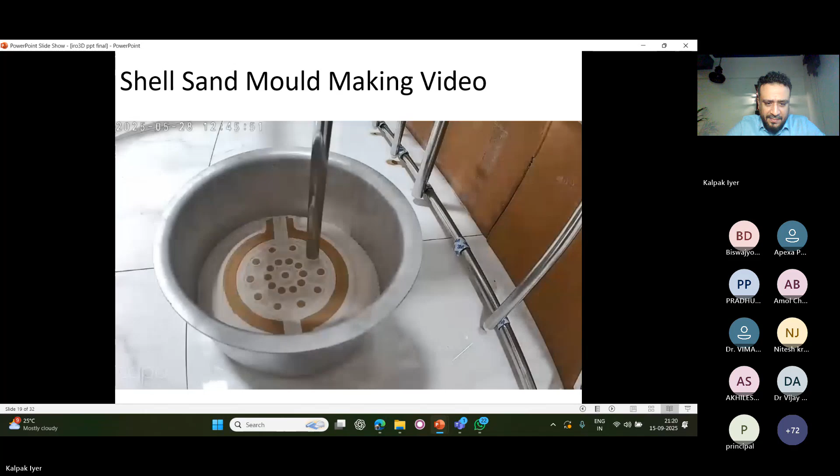It's a time lapse, obviously, since it takes a fair amount of time to get this right. We are also new to this process, so we are learning too, but we were actually able to get a successful 3D print on the first try itself. It was quite dimensionally precise as well.

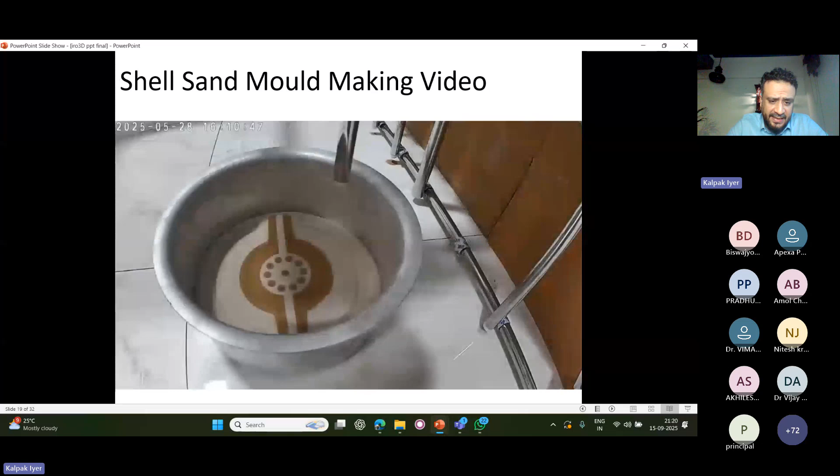So this video was just for demonstrating the process, and some sand molds and cores. This is the butterfly valve core we saw in the video. This is a diffuser cup. This is an impeller mold inside an oven, curing. And this is just a shivling that we casted in the office itself, in the early days.

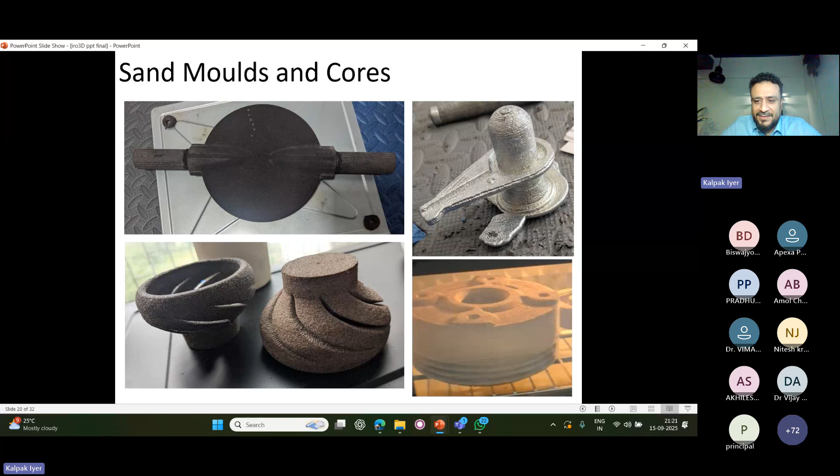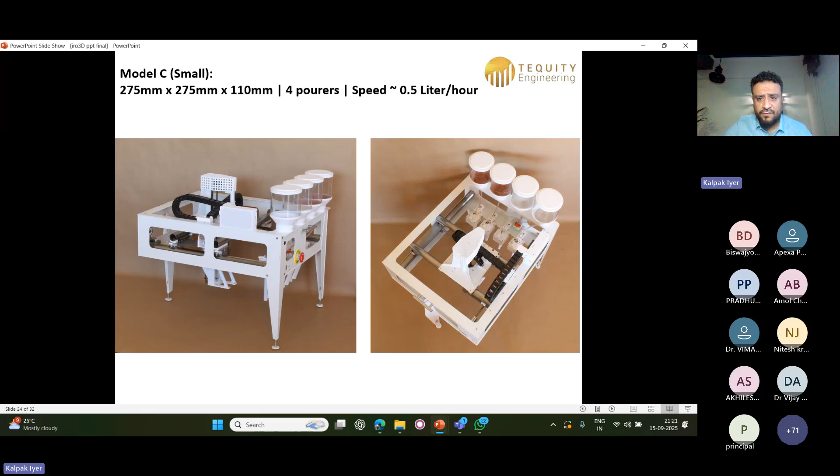We currently have two types of machines in the market. The Model C is a small machine, the entry level machine, very capable - we use 4 pourers, and it prints approximately half a liter per hour in volume. Then the Model G, an industrial level medium sized machine, has 5 pourers, is 4 times faster than the Model C, and can print on a much larger build volume.

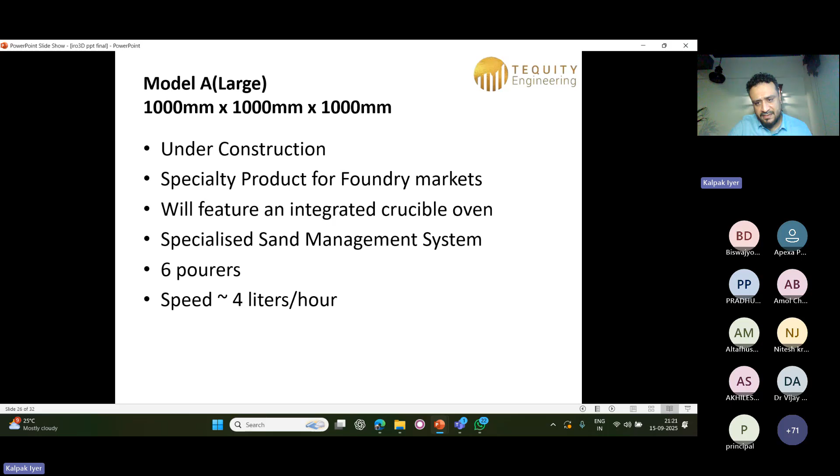And we are currently developing a large machine which will have a 1 meter by 1 meter by 1 meter build volume. This will only be for foundry customers, and hopefully in 6 months' time they should be out in the market.

Now, again, SPD versus the only other viable method to 3D print sand molds, which is binder jetting. There are only 2 or 3 companies in the world who do that, so sand 3D printing is quite new. I'm not sure many of you may have experienced sand 3D printing before.

Plastics and metals, I'm sure most of you've had some exposure to. Surprisingly, this process is 20 times cheaper in terms of machine complexity and cost than the other machines in the market - 20 times - and that's just the capital expense. The operating expense for an industry is again a fraction of what the binder jetting process costs per liter - about 10% of the cost.

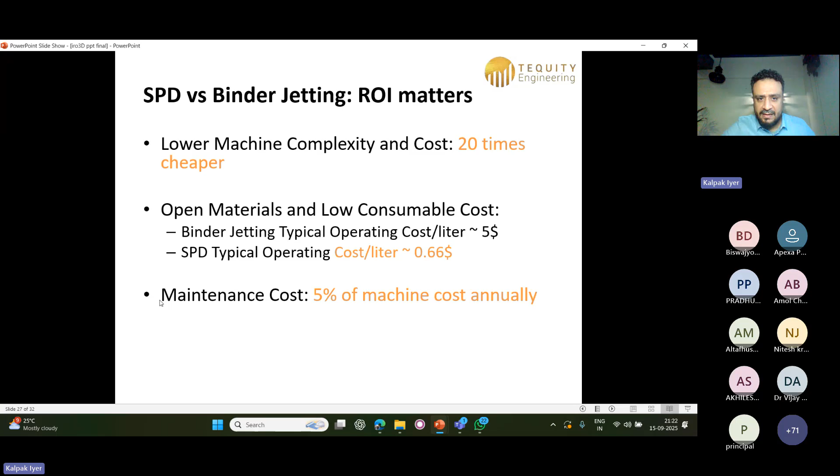And maintenance cost is again very low compared to the binder jetting process. For paucity of time, I did not cover binder jetting in detail, but if you're interested, there's a good amount of information available online about binder jetting for sand 3D printing.

Where binder jetting shines is that firstly, it's an evolved process, 10 to 20 years old. In fact, very interestingly, the car manufacturer BMW has all of their engine blocks manufactured using binder jetting sand molds and then casted. So it's a very, very well proven process. Our hope is that we also reach that level someday.

Binder jetting and SPD can both give very good surface finishes, but binder jetting is slightly better. Binder jetting providers will say buy our material, buy our binder, pay us a lot of money. Our process, we don't care - we'll give you the machine, figure it out. We also have some materials qualified by us, but no compulsions. There's no roller or inkjet printhead, so it's a simpler machine. Post processing is very similar, but total cost of ownership is again very, very low.

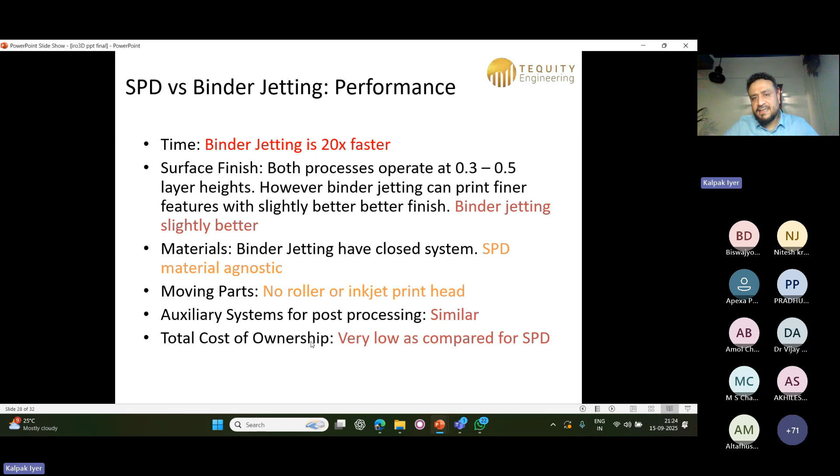Print time can vary between 2 hours to 100 hours, depending on the volume you're trying to print. It can even exceed 100 hours, sometimes even 500 hours. Very large prints take a lot of time.

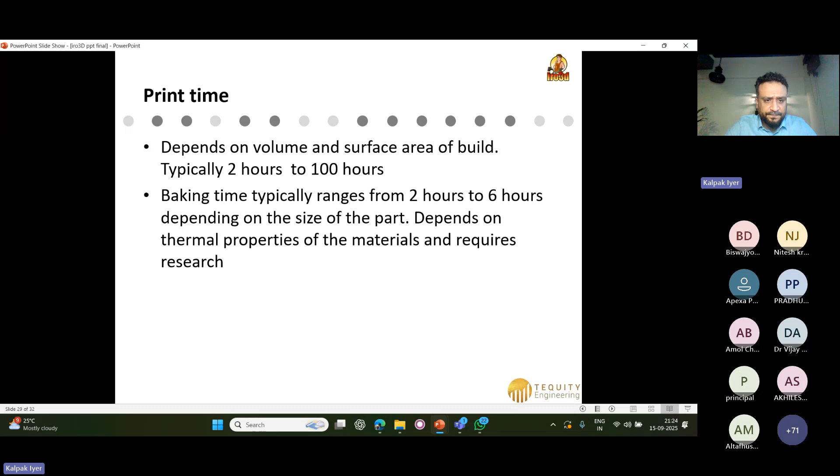Baking time depends on the process and the furnace that you're using. And for heating requirements, you need a furnace, kiln, or oven depending on what you're using.

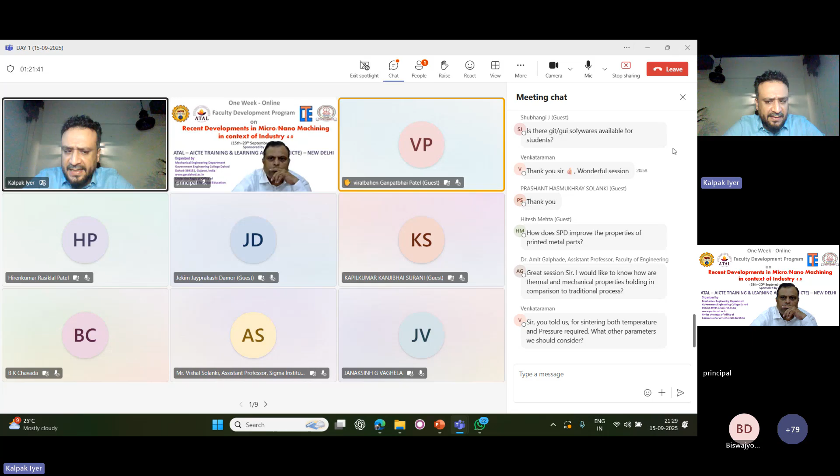We have not done basic tensile testing, but ISO testing has shown very good mechanical properties if the part is well made. This will depend on different alloys since some alloys don't have the same compositions, so it's difficult to give an apple to apple comparison. I believe in the years to come, more people and academia will adopt this process and do basic research to generate more data. We are a very small company, so it's difficult to characterize parts and do testing; it's not viable financially or time-wise for us. But it's a valid question, because why would someone in the industry be interested in parts that aren't validated? That's where we need help. Thank you for your question.

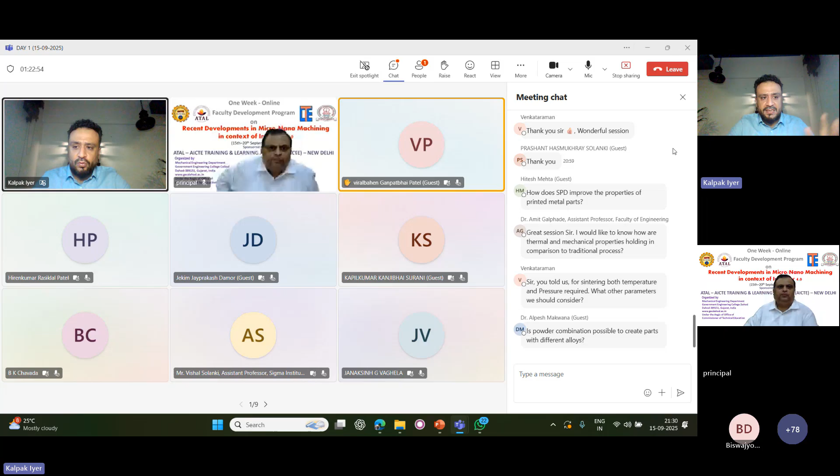Venkataraman sir asked: for sintering, both temperature and pressure are required. What other parameters should we consider? Well sir, you can do just temperature sintering, just pressure sintering, or temperature-pressure sintering. If you do temperature-pressure sintering in a tight mold, you can get very compact parts.

Most of our carbide tools are sintered by this method, where temperature and pressure are applied inside a tight mold, producing a very compact powder made into a single piece. In our case, we cannot apply pressure because we are simply pouring the powders. If I apply pressure, it will deform the part. So in our case, only thermal sintering is possible, as far as I know.

If you can come up with something for pressure sintering, the idea could be to make a part that is already deformed in the print, and when you apply pressure, it will form to its original shape. Some parts can actually do that, and then we can sinter it. Maybe that is possible, but it's a long shot. I can't say for sure.

Dr. Alpesh Makwana asked: is powder combination possible to create? This is a question we always get whenever I present on this subject. Yes, it is possible, we can combine different powders to get different alloys. There are a lot of possibilities. We have four pourers, remember, so two for each type of powder. There is a lot we can play around with. I can get into the details, or maybe we can talk personally if you're interested.